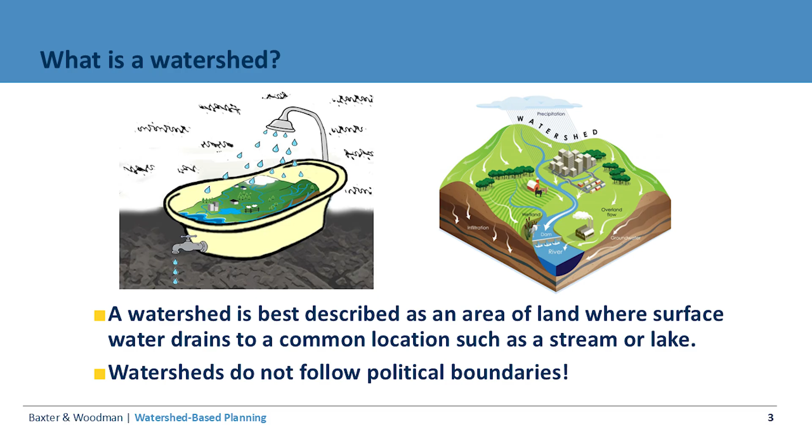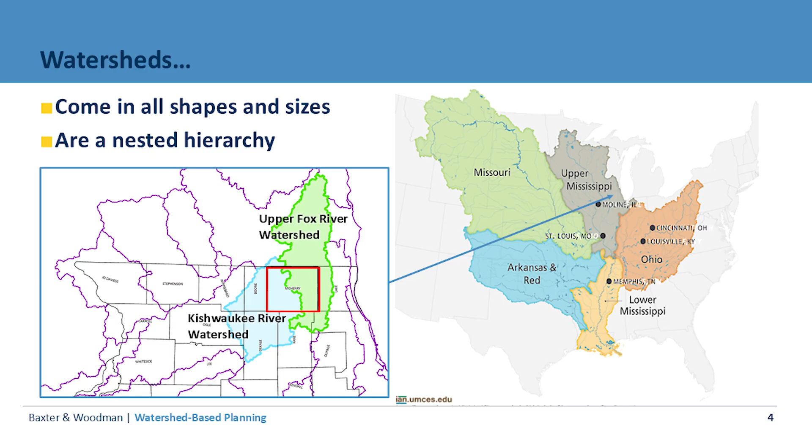So watersheds come in all shapes and sizes, and they are basically a nested hierarchy. If you remember from grade school, almost all of the water in Illinois drains to the Mississippi. That's obviously the largest size watershed that we might have. But there are many smaller watersheds nested within that. And if you look at McHenry County, which is highlighted in red there, you can see that the county is basically split between two larger watersheds, names that you might be familiar with. On the western side of the county is the Kishwaukee River, and on the eastern portion is the Fox River, the upper Fox River Basin.

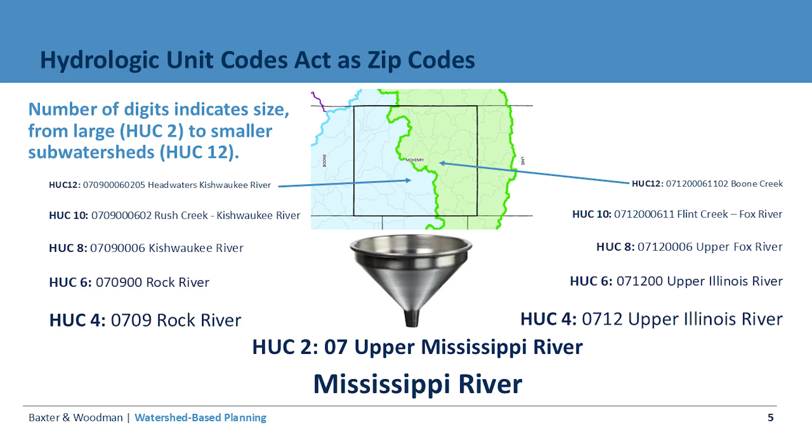So years ago, the U.S. Geological Survey developed a way of basically assigning zip codes, if you will, or addresses to watersheds, and they called them hydrologic unit codes. Essentially, the numbers indicate the size of the watershed. So starting with the largest watersheds, a HUC 2, that would be something along the lines of the Mississippi. And every time you add 2 digits, you're getting a more granular, smaller nested watershed within the larger one. And the watershed-based planning, which I'm going to be talking about today, mostly happens at the HUC 12 level.

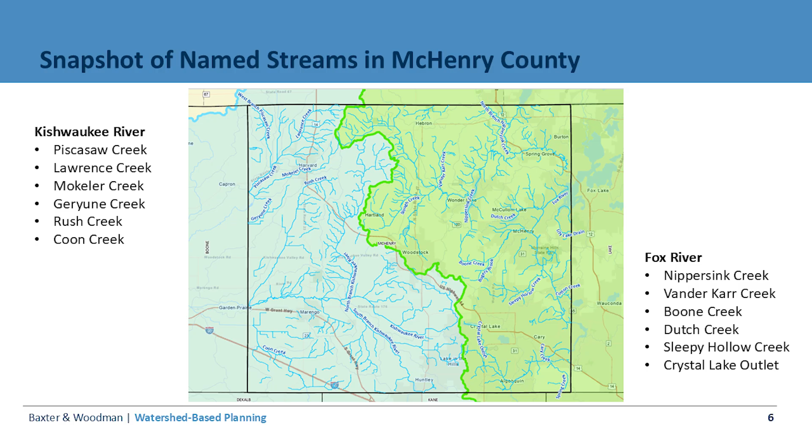And you've seen some of the booths of some of those watershed groups out front.

So what is watershed planning? It's a voluntary, community-supported process that assesses the health of watersheds and develops strategies to improve them. And it's an opportunity to bring the community together to share in the work and cost of restoring our watersheds. It took all of us to get to the state we're in today, and it's going to take all of us working together to repair our watersheds.

Most of my work focuses specifically on watershed-based plans. That is a very particular name. They might also be referred to as 9-element plans or 319 plans. It is a type of planning process that was created by the US EPA. They focus on ways of improving water quality and protecting watersheds and encouraging the development of assessment reports, management plans, and then implementation of those plans.

And the planning process leads to the identification of restoration projects and policy changes. It is a voluntary program, meaning that it's not regulated. EPA and others provide funding to incentivize people to do the work. So that's really important. Having a watershed-based plan opens the door to funding opportunities to get that work done.

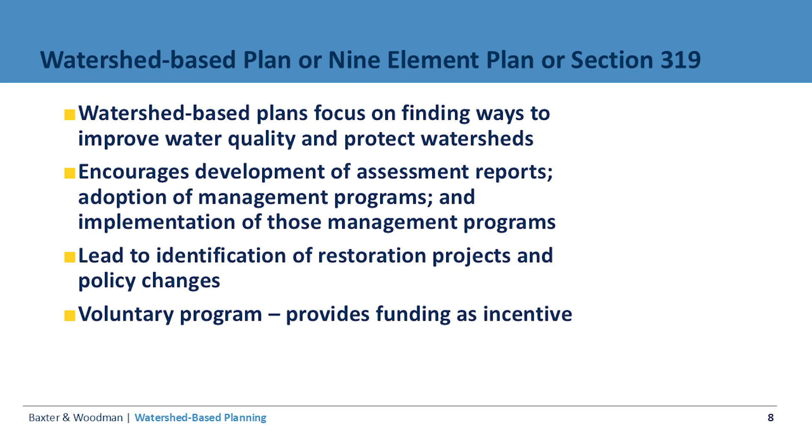So why do you want a watershed plan? Well, to determine the health of your watershed, quantify the restoration needed to improve water quality, identify those actionable projects on the ground that can restore water quality, and build that support for implementing the plan during the planning process, and then to prioritize those projects for funding. So we have a list of which ones are most important and the ones we want to start with.

So who typically leads the watershed planning process? It's typically led by a single municipal leader or a watershed champion. And we have some watershed champions here in the room today. Regardless of who completes the plan, it benefits all of the residents and municipalities within that community. And typically during the planning process, the cost of the plan itself is shared out amongst the municipalities within that watershed. And the planning process can pay for itself.

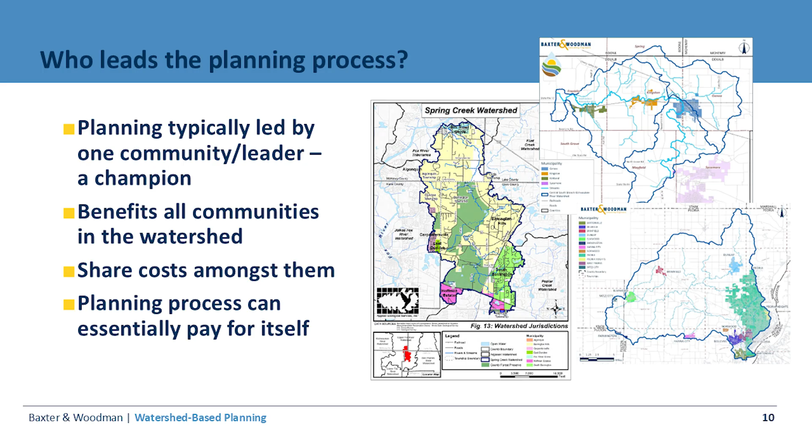Again, there are programs out there that will get you funding to implement the projects, and if you were to get funding for even one stream restoration project, you're probably going to get back twice as much as what you would have put in to the planning process itself.

So the steps of the watershed planning process start with building those partnerships with the community. First and foremost, we're going to assess and characterize the watershed, what's going on, the existing conditions. We're going to develop goals and identify actionable solutions to repair water quality and design an implementation program to get the work done over time. And then also in the plan, there's basically a way to measure plan progress over time and monitor, making sure that what we're doing is remedying the issues. The watershed planning process might last 1.5 years or 2 years, and over that time period, usually we're meeting every other month. So again, building those partnerships.

So taking a step back, I've been talking a lot about repairing water quality. So let's talk a little bit about what affects our water quality. Water pollution, surface water pollution comes sort of in two main sources. The first is permitted sources, or point sources, which include things like wastewater treatment plants, industrial polluters, and construction sites. All of these are permitted sources.

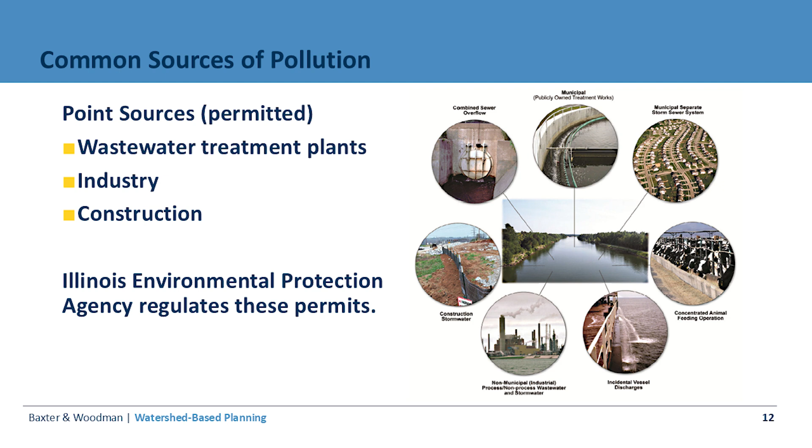So that means Illinois Environmental Protection Agency has permits with these entities, and they agree on what those entities are allowed to discharge. A watershed-based plan focuses on everything else, which is basically considered non-point source pollution. So overland flow, any pollution that might come from urban sources off of streets and parking lots, or agricultural areas, or stream bank erosion. So again, that's the focus of a watershed-based plan.

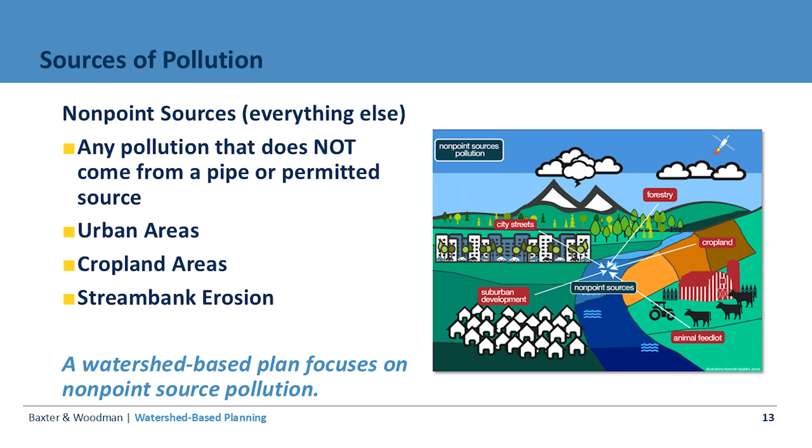There are basically 3 main pollutants that we focus on in these plans, and those are nutrients, which are nitrogen and phosphorus, and sediment. Nutrients are obviously necessary for plant growth. We need that in order to grow our crops so we can eat.

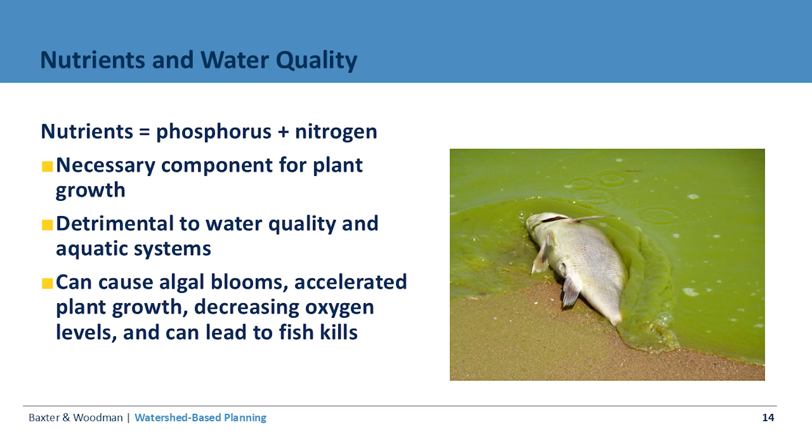But some of those same nutrients are very detrimental to water systems, aquatic systems. Aquatic plants cannot take up nutrients at the same pace as plants on land. And it can cause algal blooms and accelerated plant growth and lead to fish kills. Sources of nutrients include stream bank erosion, agricultural runoff, lawn fertilizers, failing septic systems, and some of those permitted sources that we mentioned earlier.

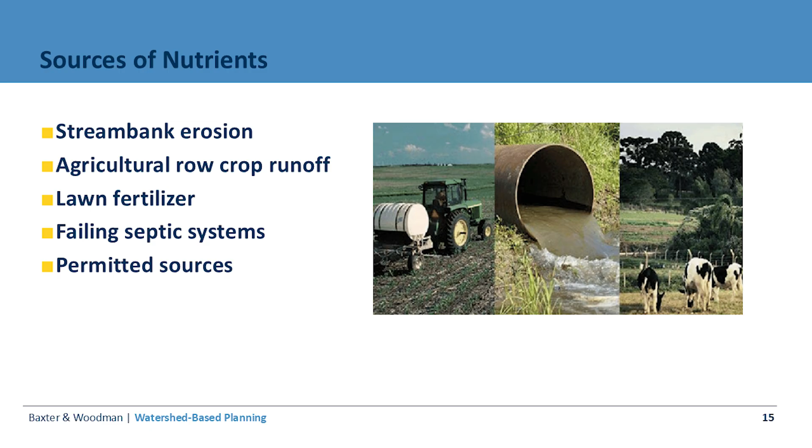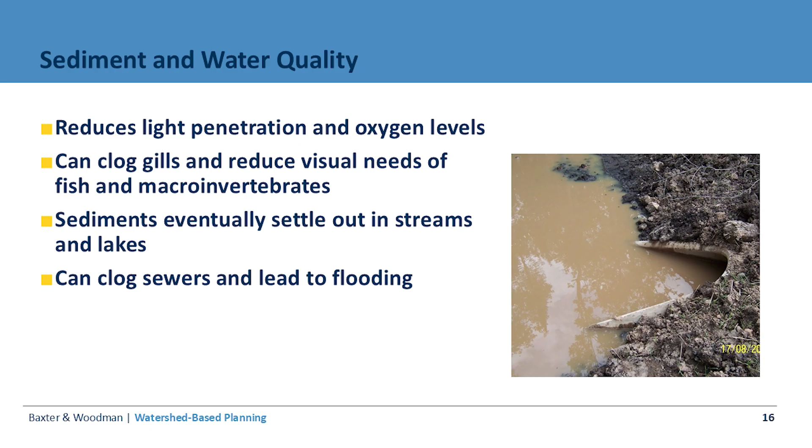Sediment reduces light penetration and oxygen levels, and it can clog fish gills and make it harder for fish to see and be able to hunt and feed. And it can also settle out in streams and lakes, causing the need for dredging, et cetera. And it can also lead to flooding if it's clogging some of our sewers.

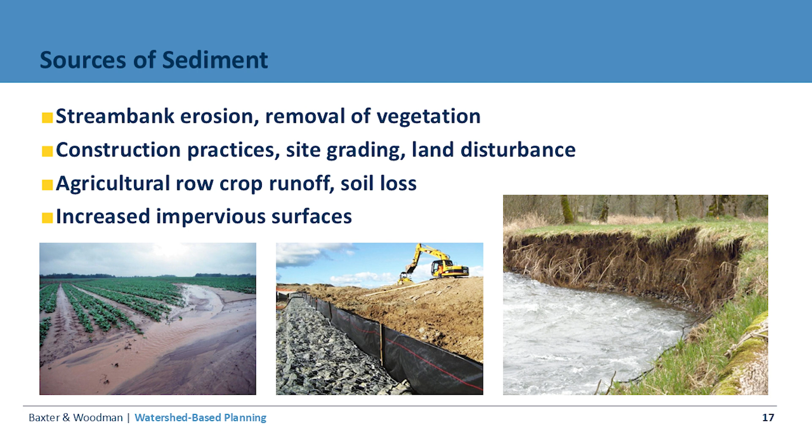Sources of sediment include stream bank erosion and bare banks, construction practices, site grading and land disturbance, agricultural row crop runoff and soil loss, and increased impervious surfaces. So all of things that we all deal with in both urban and rural areas.

So a watershed plan is going to include an action plan, which essentially serves as a roadmap to how we can restore water quality. That action plan is typically divided into 2 components. The first half is a programmatic section, which includes policy recommendations and watershed-wide recommendations, things we could do anywhere, like this is a type of practice we might want to install. And then the other half of the action plan is the site-specific measures. Those include the on-the-ground projects that we would have found early on in the planning process, and include things like stream bank restoration projects, et cetera.

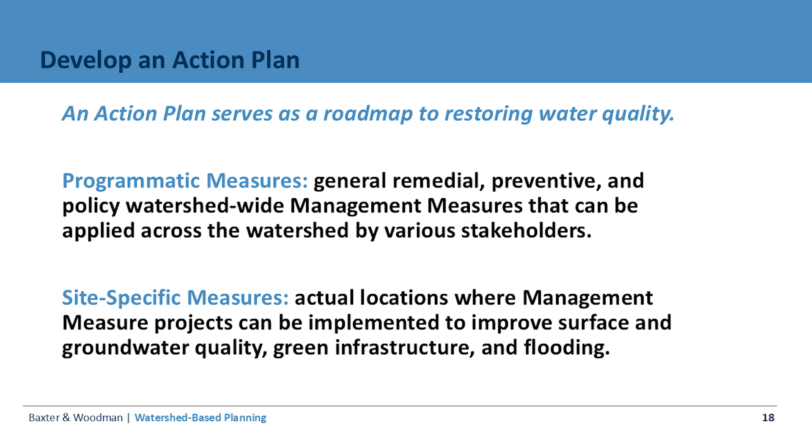In any one watershed plan, there are usually many policy recommendations, and McHenry County is already doing a lot of these, but typically, first and foremost, we want to have the communities adopt the plan so they can implement it. We would encourage ordinance reviews and updates, green infrastructure network protection, sensible salting programs. I know McHenry County has a pretty amazing sensible salting program already. Conservation design and low-impact development guidance, green stormwater management, septic system maintenance, native landscaping, and pavement alternatives.

And then the site-specific measures, and these vary from watershed to watershed, but most commonly they're going to include stream bank and riparian area restorations, first and foremost, wetland restorations, detention basin retrofits, agricultural practices, and then other urban BMPs such as rain gardens, permeable pavers, and bioswales. And I know Brad and Michelle will be talking about some of these various measures in their presentations. And all of these are meant to address water quality, but almost all of them also include flooding benefits. So they're definitely going to provide multiple benefits for the community.

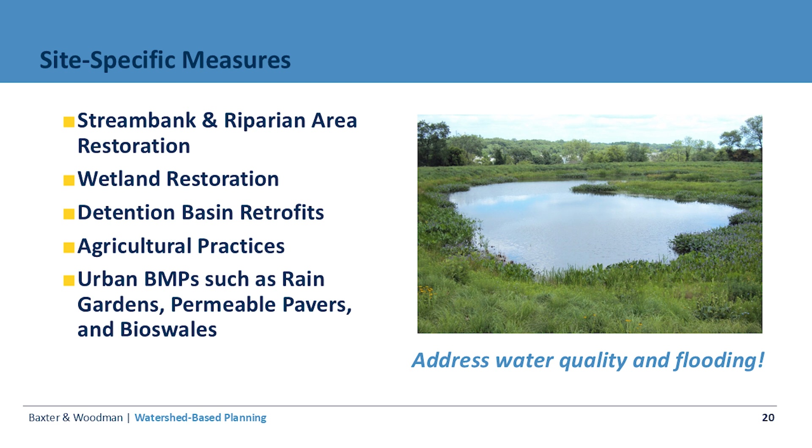We include a site-specific action plan table in all of our plans. Probably boring for the average person, but it's basically a big long list of maybe upwards of 200 projects where we have done the homework ahead of time so that the community is ready to go out for funding for these. It's going to include information on where the site is located and what those existing conditions are, what our recommendations are to restore that site, an expected load reduction for removing some of those pollutants, a priority, and then some guidelines on who is responsible for implementing those projects. But the point is, it's ready to go out for grant funding.

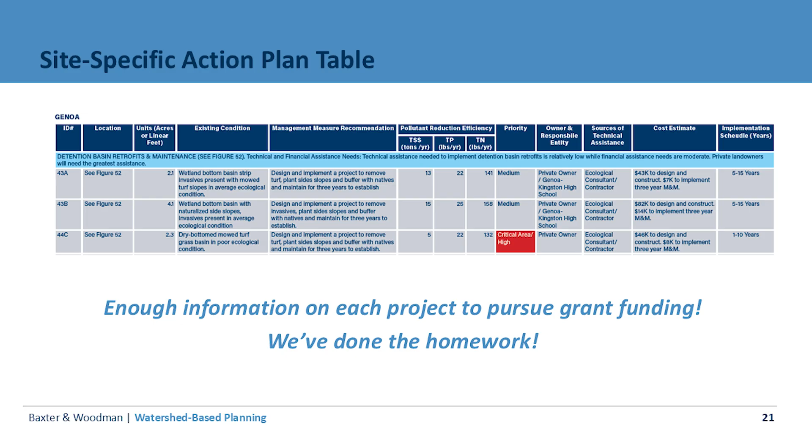And then there's a whole section of the plan dedicated to how we're going to implement them. It includes a schedule for all of those projects, as well as an identification of roles and responsibilities for who is going to be doing the implementation. An information and education program: how are we going to get the word out about the plan so that we know what recommendations are included?

It's going to include a water quality monitoring component. How are we going to measure water quality to know that over time we are making improvements? And if we're not making improvements, we want to know that so that we can adjust and adapt our plan accordingly. And then it's also going to include potential funding sources. So

I've mentioned up at the top that a watershed-based plan opens the door for funding through the 319 program, but it also opens the door to other federal and state programs. And they cover a whole range of topics, including water quality, restoration, agriculture, flooding, and stormwater management, wildlife habitat, and recreation and trails grants. And there's also limited funding available to do the planning work itself through a couple different programs through IEPA.

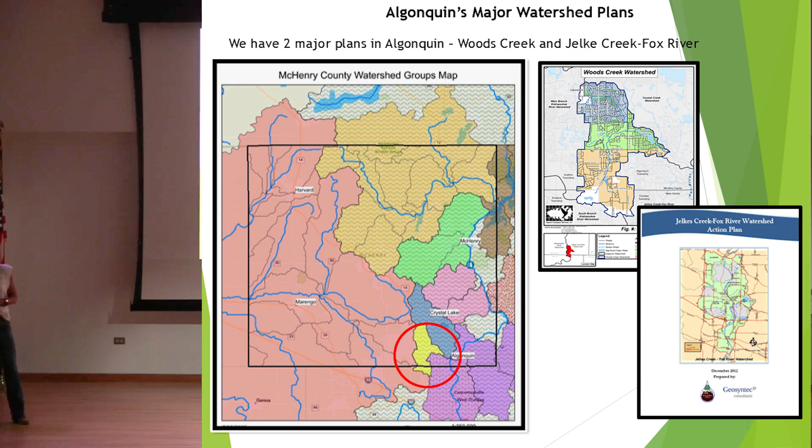In the village of Algonquin, we are in two major watersheds, the Woods Creek watershed and the Jelke Creek-Fox River watershed. You can see where we are right here. I'm going to talk about what we've done specifically in the village of Algonquin in these watersheds to implement the things in our watershed plans.

First question is, why do you want to implement your watershed plan? The plan has a lot of goals in it, and you're trying to achieve benefits for your community and you're trying to mitigate problems that you have in your community. We also have all regulations now. We have our MS4 permits, our county stormwater ordinances, other things that require actionable items that are coming up.

Some of the goals that we're trying to achieve: stormwater runoff storage. So we want to reestablish or increase volume in detention basins. Stormwater infiltration and water quality. We want to do some flood mitigation. All of our communities are probably experiencing that a lot now. So we want to reestablish the floodplain connections that we have.

We are, as Cecily talked about, trying to stop and lessen erosion and sediment control. And then a tertiary benefit of all this is wildlife habitat, biodiversity, and beautification. Just some examples of all of these goals that we've done in Algonquin.

This is where we were recreating runoff storage. So this area back here was a detention basin. It's all grown in with invasive species. Here's the detention basin. We did a restoration and we reestablished the detention.

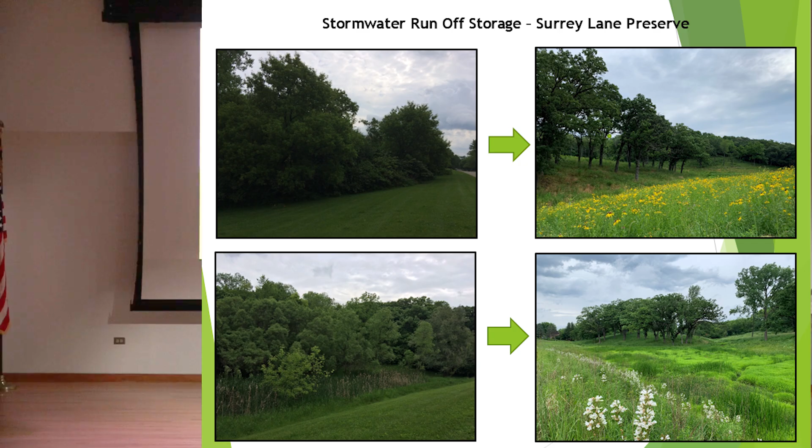We dredged this out. Every time it would rain, it would overflow this basin and run down the street and flood out 2 or 3 garages. So we don't have that problem anymore. And lo and behold, when we did the restoration, there was a beautiful oak woodland behind this detention basin.

This was a project we did. We've done many of these for water quality. So we have the typical turf grass detention basins that were built back in the 70s, 80s, 90s. And I think all of them in Algonquin now we have retrofitted to naturalization. So you can see the benefits we get with that, with water infiltrating and filtering through this. It cleans it before it sends it downstream.

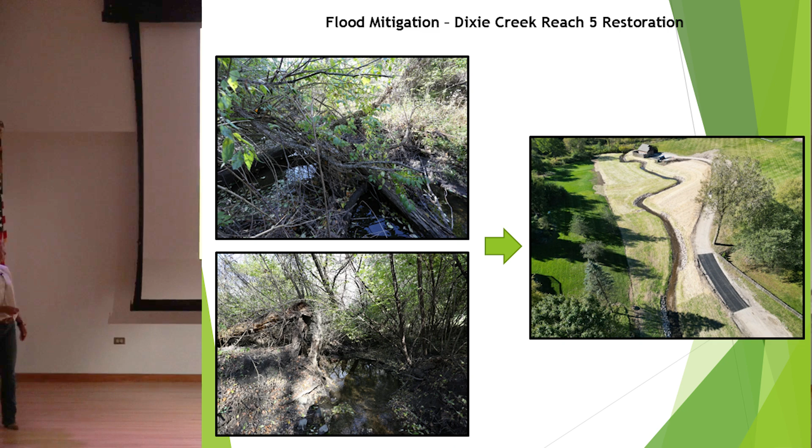Flood mitigation. This is a creek restoration project that we did. We had some flooding that would always occur here where there's a culvert, there's a house over here. We would flood out the house with this creek because this is what it used to look like. The water couldn't flow, the banks were eroded, and the debris would get jammed up and it would flood out all over this area.

Erosion and sediment control. Like I said, we've done many projects for this, creek projects, some before and after. And just so you know, on all these pictures, I am standing relatively in the same place on the before and after photos. So you really get a perspective of what it looks like when it's done. So here we're restoring the stream, reestablishing the floodplain, and why that's important is I want to show you this little video.

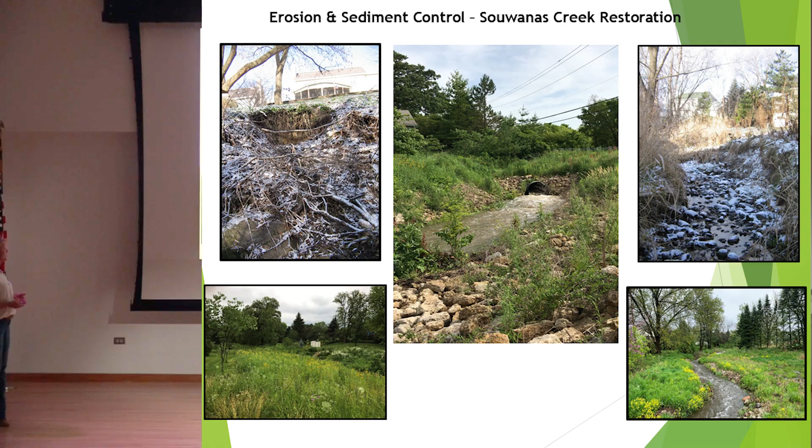This is after a 4-inch rainfall, so you can see the creek is staying in its channel. We have cross vanes, we have stone toe protection. All of this helps with that erosion control and sending the water correctly downstream. So that's how your creek restoration should look and how it should work after you have a significant rain event.

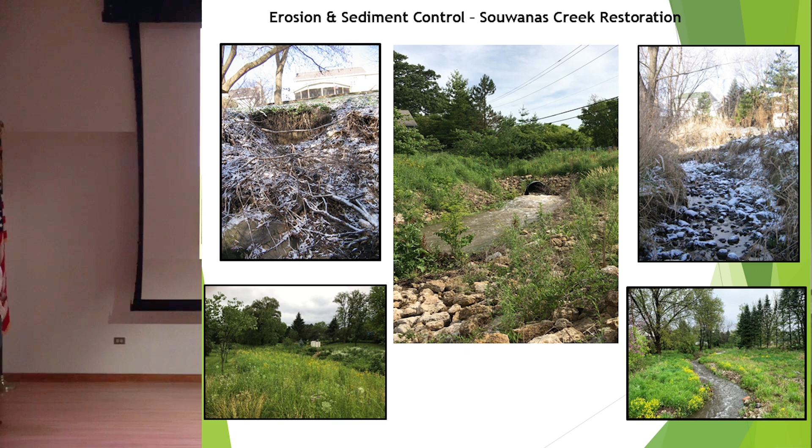So the next thing is to figure out where we want to implement our projects. Cecily talked about this a lot. In your watershed plan, you will have a list of action items. This will list all the things that you can do in the watershed, who owns them, if they're critical areas so that you can prioritize them, and a cost estimate and a timing for the projects.

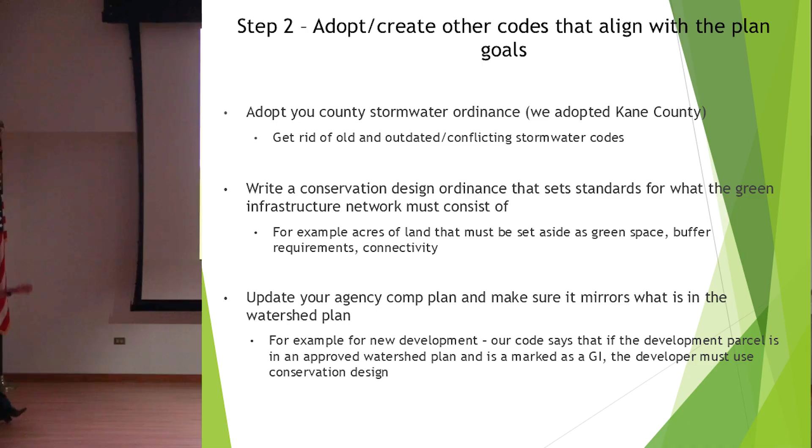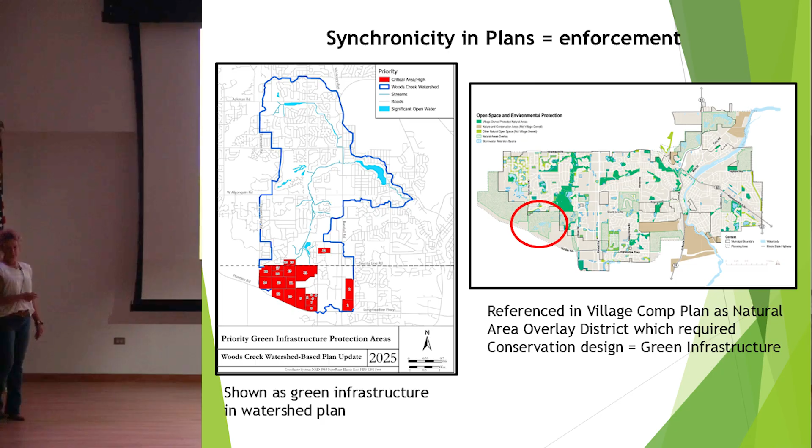Here is our watershed plan, and it shows our priority of green infrastructure areas. Then the village's comp plan has this directly shown in here with the coding that it's a natural area overlay district. Anybody who comes into the village looking at your comp plan, looking to build or do anything, knows right off the bat that this is your game plan and you've got it set and you've got it prioritized in your agency.

You can use the stormwater ordinance. The county stormwater ordinances often have measures in them for collecting fees and getting funding for doing projects. The Kane County stormwater ordinance allows individual municipalities or agencies to collect the fees ourselves. So that ordinance has a wetland mitigation fee for isolated wetlands or anything that's not under the jurisdiction of the Corps. We can charge a fee in lieu of wetland, which we charge $100,000 per acre.

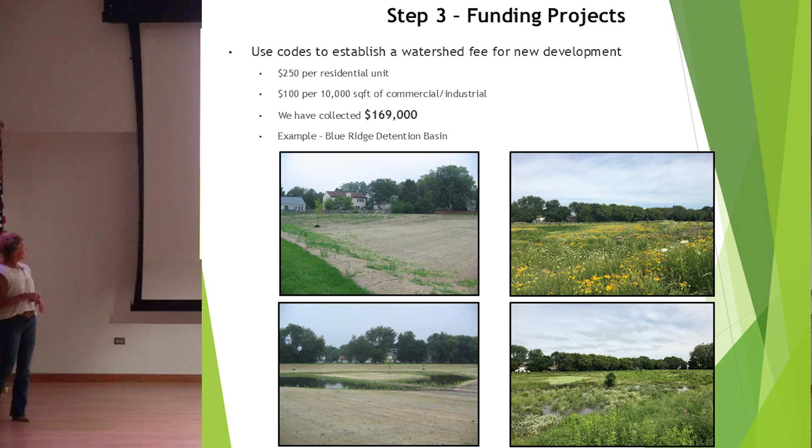There was a detention basin behind all of this that was just full of phragmite and cattail and honeysuckle, buckthorn. We cleaned it all out. We reestablished the detention basin volume, and we made a nice little, we call this the Gaslight Park Bird and Butterfly Sanctuary.

Another way, Cecily talked about this a little bit, is to get grants. There's a lot of things out there, EPA, private grants, ComEd, clean energy. Soil and water conservation districts often have funding for your projects. DCEO, we've gotten funding from them. And you can see the amounts that we've collected over the years through our grant funding.

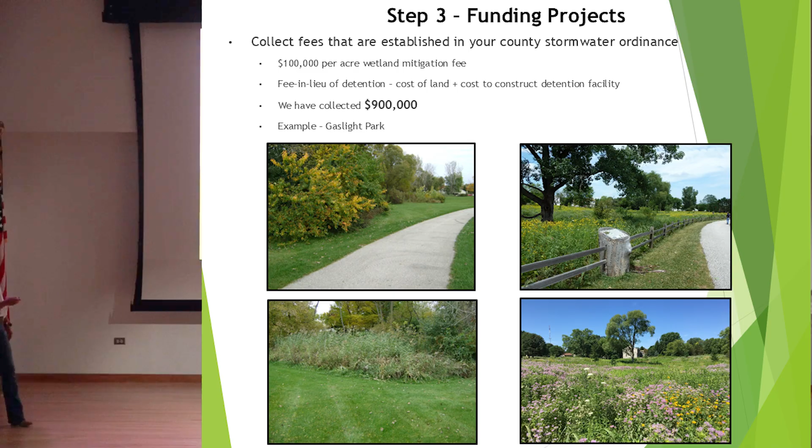I just highlighted here an EPA 319 grant, which was our Rat Creek Reach 5 stabilization. So we did a stream bank project, pulled back the banks, cleaned it up, reconnected the floodplain, and made an upland prairie area. And there's an oak woodland up in here too that we restored.

Another great way to get your projects is have new development coming in. If you have that opportunity in your community or agency, have them build and put the green infrastructure into your community. Since development started back up about 5 or 6 years ago, we've had all these different subdivisions and areas come in where we have required that they create and give us green infrastructure. Between all of these, they've installed about 87 acres of this that they've dedicated to the village. The value of that 87 acres is about $4.3 million.

I'm highlighting here just how we use those codes and plans to make that happen. The watershed plan has this area as in our green infrastructure network. It was a golf course. A developer came in, wanted to make it a subdivision. We used the conservation design ordinance, all of that, to make this beautiful meandering wetland detention natural area.

About a third of the subdivision is green infrastructure that was dedicated to the village. We're going into like our 4th year of establishing that, and it's just absolutely gorgeous, beautiful. That project alone was worth about a $1.6 million value.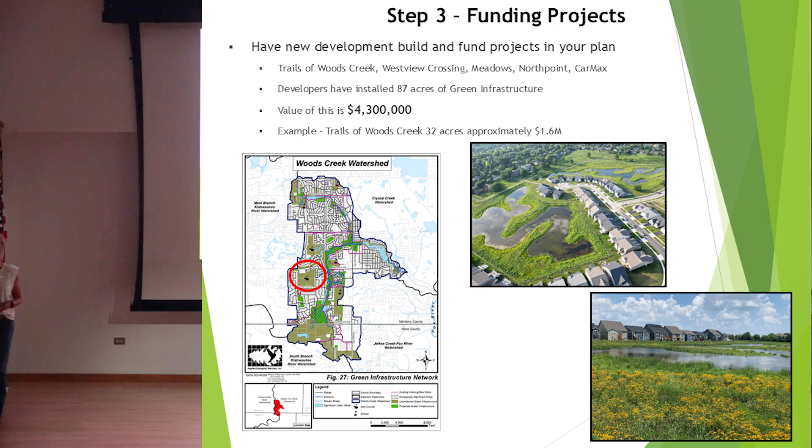Finally, you also can create some other local funding sources. Our board has been so supportive of our green infrastructure program, what we're doing, the environmental aspects of bringing in new development, what that means for the village, for groundwater, for clean water. So we have a telecommunications tax, which we have put towards doing projects, doing maintenance of projects. We also collect the local sales tax, and they support us in putting those dollars towards doing restoration projects.

Another option for getting projects done is to build them into other construction projects. So I'm Public Works and I'm the cheerleader, so I have an advantage to adding these into a lot of the things that we're doing in the village. An example is we got federal funding for a road project, and we were widening the road, so we had to put in extra detention, and we made the detention basins naturalized. So federal funding helped for paying for that green infrastructure. Presidential Park, we just got an OSLAD grant, and we put in naturalized detentions in Presidential Park. So the OSLAD funding helped pay for that.

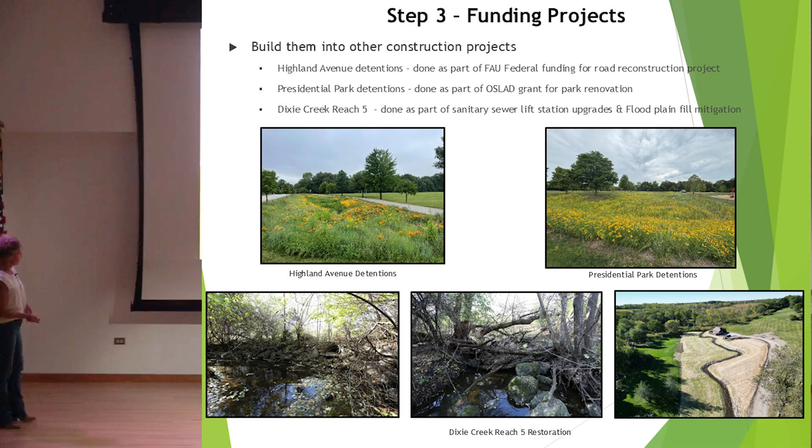Some other ideas that you can utilize, we do not do these in the village of Algonquin. We have all those other measures that we implement, but you can certainly establish special service areas and collect fees to fund some of your projects. You can establish a stormwater utility fee in whatever way that looks like for impervious area in your community, and you can work with a lot of nonprofit organizations out there. Sometimes they will help you install the projects. If you have projects installed, they will sometimes help you with the long-term maintenance of this. Brad's going to talk a lot about the importance of what that is.

So basically, to sum it up, we have funded about $14 million worth of projects in the village of Algonquin through all of our different funding sources. None of that was property tax money, none of it. It was all the mechanisms that I have spoken to you about. I leave you with, it's possible. You can do it, you can make this happen. One of my favorite things is teamwork makes the dream work. And with that, Brad is going to talk to you a little bit about long-term maintenance of these and a little bit of, once we've got the funding, how they are constructed and get built.

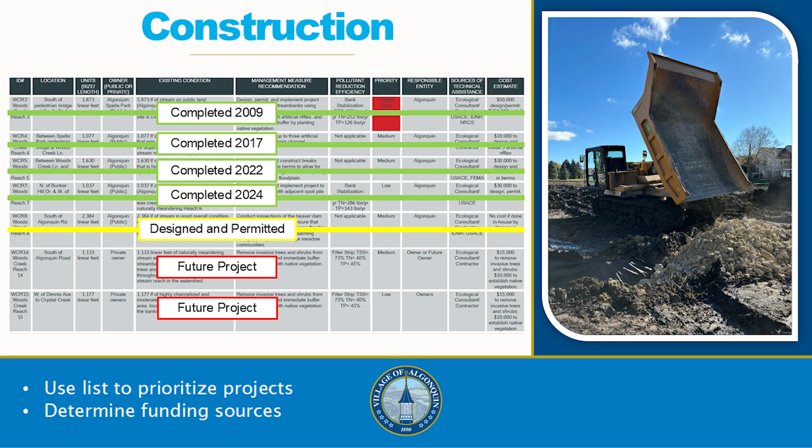We have currently applied for an EPA 319 grant, so everybody keep your fingers crossed that we get that so we can construct this project next year. And then we have 2 other reaches that are future projects that are on our list to complete as we move through. So, like I said, these are very important action plans that are something that you can move through with that homework being done, and you can just go through the list and the prioritization is done for you.

Ecological restoration, I've heard that a few times tonight. What does that mean? It's really important to have a clear view of what ecological restoration means to you and your organization before you undertake one of these projects. Typically, it means restoring using native vegetation. There's a lot of gray area in there, native to what time frame, what ecosystem, what book, what research, but that's the base level of it. We're typically looking to restore these areas to pre-European settlement conditions. So before Europeans came over, put a plow to everything, put agricultural drain tile in, drained all the wetlands.

There are a lot of design, permitting, maintenance considerations when working on an ecological restoration project. For example, a place like NLI or Citizens for Conservation, they're more focused on those very high C-value, very high quality restorations. They want to get as close to a remnant ecosystem as possible. In the village of Algonquin, we don't have any remnant systems left. We're working with very degraded areas, and our goal is not to get back to a remnant, high-quality prairie, but we want to get 70% of the way there.

We want to have the bang for your buck plants that are giving those ecosystem services that are maintainable and also able to be constructed at a reasonable cost, because we don't have a huge volunteer base. We don't have local seed sources to make wonderfully diverse mixes. So we're more of that bang for your buck, what's going to get us 70% of that way to that remnant ecosystem.

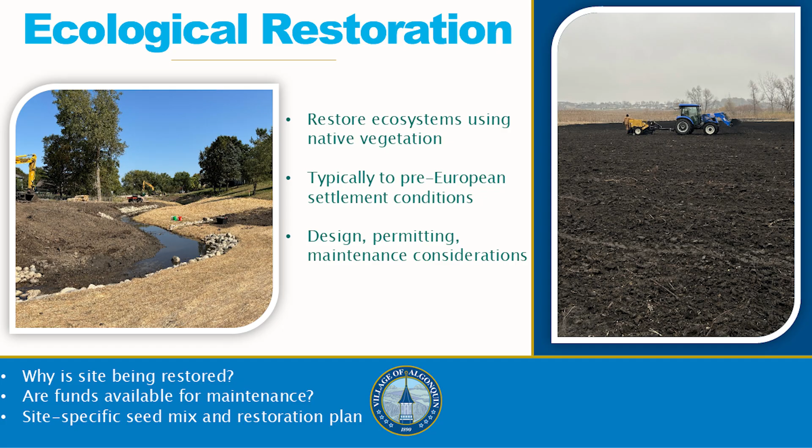A couple of design considerations. Aha, got a laser, I love lasers. This is another shot of Woods Creek, Trails of Woods Creek restoration that Michelle was talking about.

When you're looking at designing these naturalized detention basins, it's really important that you're involved from the concept phase, working with the engineers or the developer when these are built. They're built a little bit differently than your normal turf grass basins. Really important to have this area here from normal water level down to about 6 to 12 inches below normal water level. It's a shelf for emergent plants that like to be submerged most of the time in that shallow area. Those plants will grow up and they will do a lot of things for this basin.

They will stabilize the soil. They will act as a filter. They will help keep the nutrient levels down in the water. And then a lot of times, if you choose the right plants, something like pickerel weed, it ends up being really pretty, has a really beautiful flower to it. So those are a lot different, where a lot of the detention basins, it's a 3-to-1 slope to the normal water line, and then it dives off and you don't have that nice emergent plant zone shelf.

Above normal water line, it's important to use the hydrographs or the bounce, so when it rains, when the water comes up and drops back down, you gotta look at those hydrographs and be able to plan out your seed mix, keeping those in mind, because each of these basins acts a little bit differently, and you have to site the plants in the correct zone, because in that area where it bounces, you have to have plants that can be out of water some of the time, can be inundated with water for a day, 2 days, even up to a week. So it's really important to have that kind of wet prairie zone in that bounce as that pond fills and drains over time. And then above that, you can have your more mesic, your drier species above that high water level on the pond.

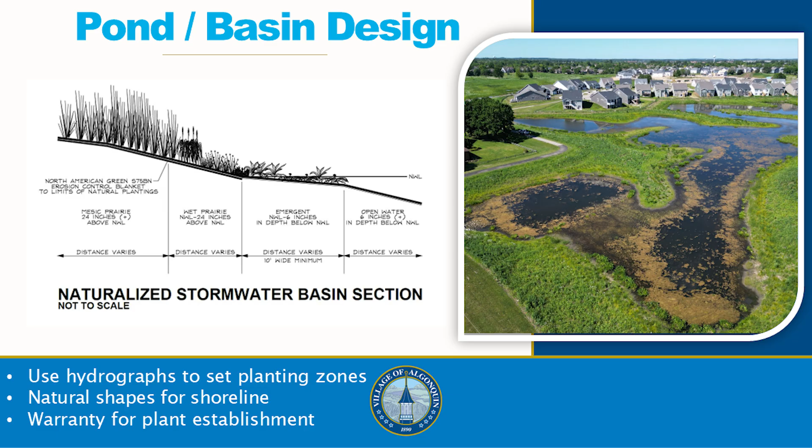As Scott had mentioned earlier, all of our drinking water comes from groundwater in McHenry County. So having that recharge and that slowing down of the water to keep it going into those shallow aquifers is key to sustainability for our drinking water. And nowhere is that more important than here in McHenry County. So having those established floodplain benches to allow that recharge is very, very important.

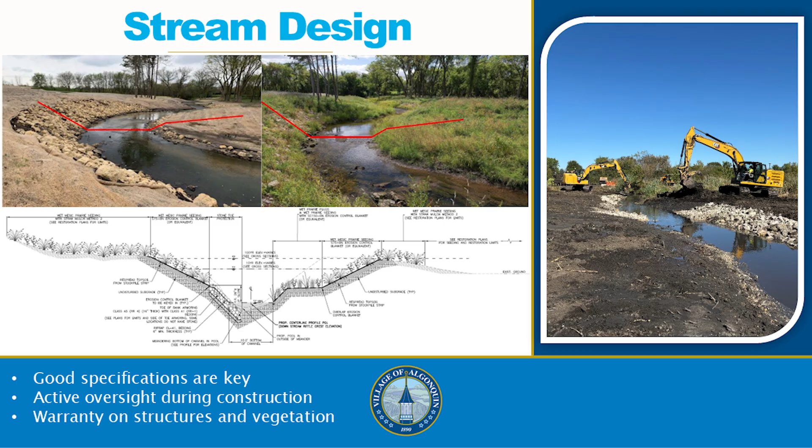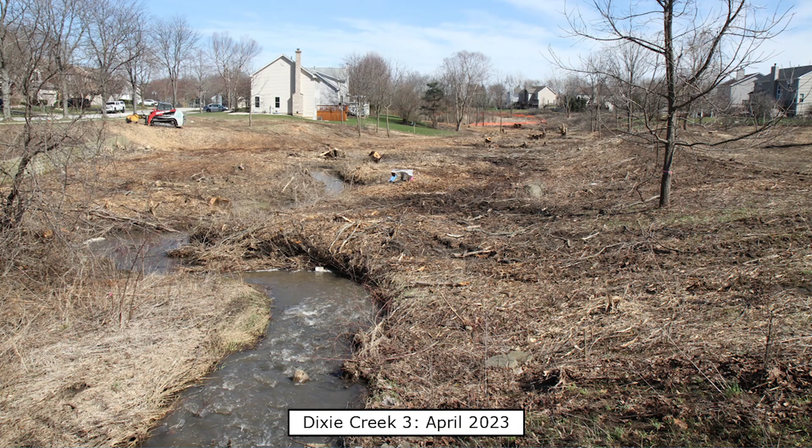This is what I like to call the bomb just went off phase. So this is where I get probably the most questions and the most complaints, because we come in, and this is where you see all the trash. You see like little kids' toys. We've found tents, we found cars, we found buckets, you name it. It's in there, and you find it all when the trees come down. But here you can really see the condition of the stream. It's severely eroded on the banks. There's really no connection to that floodplain bench.

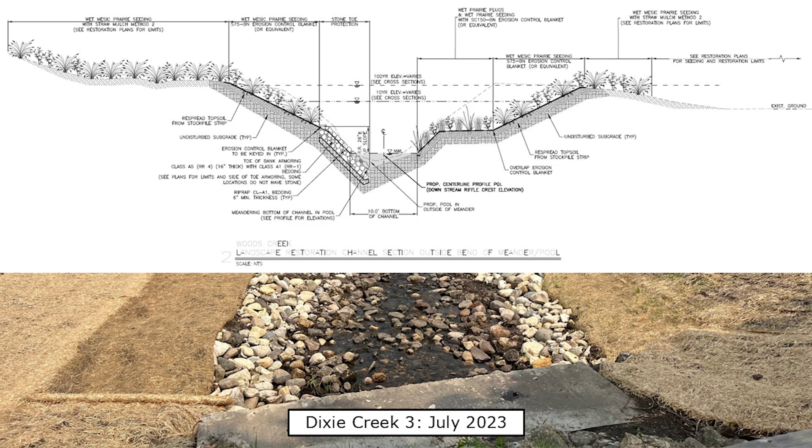Once again, I want to point out the importance of this spot here, the floodplain bench. We've got armoring here on the outside bend of some of these to prevent erosion from cutting into the bank. And then on this side, in this cross section, you can see the floodplain bench that's set right at that bank full elevation. So when you get that 2 to 6 month rainfall, the water will spread out and slow down.

A lot of people will walk by this and think it's always looked like that, nobody's been in there. Little do they know all of the design, all the maintenance, and all the work that went into these, but that's kind of the intention, is that 95% of the people are gonna walk by and be like, oh, look at this. It's a beautiful stream with a beautiful prairie.

Some of the lessons that we've learned implementing these projects over the years, one of them is the importance of construction oversight. So you have these plans that are drawn up, and then you hand it off to a contractor. You need somebody on site who knows how to read and interpret those plans, who's on the team of the owner to be able to advocate for the proper construction. They're checking things, they're double checking things, they're triple checking things.

One of the issues we had in one of our projects is that bankfull elevation was set too high. So the banks were up higher than they should be. And we had installed these massive rocks. Each of these rocks is hundreds and hundreds of pounds in these cross vane structures. And what happened with that bankfull elevation being set at the wrong height? When we had a rain event, the water would rush down and created a big pool, a scour pool.

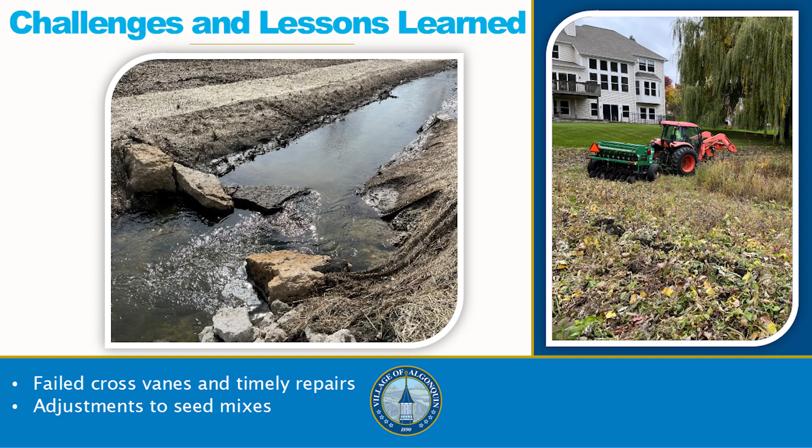There are some other species that kind of fall into that bully of the prairie. Big bluestem, Indian grass, New England aster. There's a few of those that we've learned they just don't really work well on these small sites in the more suburban environments.

Another lesson learned is a restoration project we did in 2013. This was tied with an IDOT bypass project, if you know the Route 31 bypass that goes around to the west of downtown Algonquin. We relocated a section of the Crystal Creek outlet during that project, and we found out during some regular monitoring that the stream bank was eroding. This is right after construction. This blue line was where it had eroded to. So within 10 years, we had lost about 10 feet of the bank that had eroded.

Found that after a burn. I like to walk the sites because you can see everything really well, and I was like, uh-oh, Houston, we got a problem. Got to take care of this. So put together a plan to get it permitted, took it to our board to get approved. Like Michelle said, we have tons of support from our board, and we got this fixed.

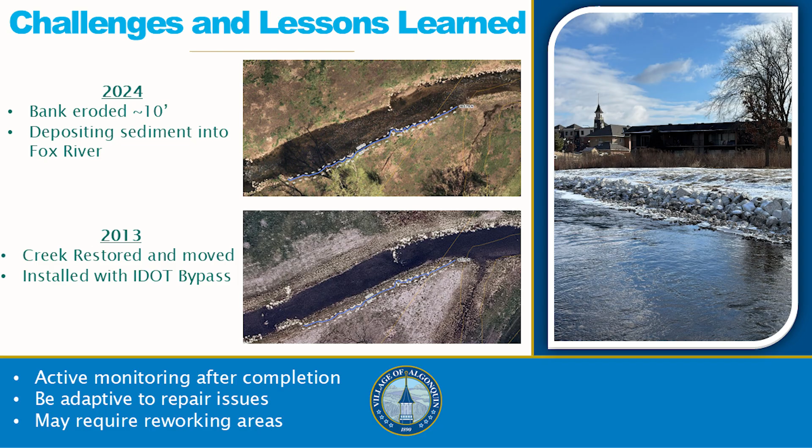So this is what the site looked like before, and this is after the emergency repair was done, where we went in, pulled back those banks, actually built it back up a little bit, put in some stone toe protection, and got that stabilized. So the big takeaway there is just because the project is done, it doesn't mean that you're not going to have to go back in and do touch-ups. This was a big touch-up. We try to catch them before they get that big. But nonetheless, once the project is done, it doesn't mean you just walk away and you go, okay, it's a restoration, we're done, see ya.

Now what I really like to talk about, maintenance. In some ways, this is the difficult part of the project. Establishment maintenance, the first 3 to 5 years are really key to the establishment of these sites. That's when the site's been disturbed, you get all these opportunistic, early successional species that come in, your ragweeds, clovers, and they go, ooh, we got all this new habitat, let's grow up. So all of a sudden, you've got all these weeds, and people come by and say, looks like that project is just full of weeds. I'm like, yep, it is. First year, it's like 70% weeds. That's why we go in and mow it.

That establishment maintenance is more hands-on, it's more intensive. It's something that takes a lot more effort. So it's important to have that adaptive management to be able to call your crew and say, hey, we need you out here. We've got some sweet clover that's blooming. Ragweed's going crazy. It typically has higher cost than your long-term maintenance, so it's really important. We build that into a lot of our projects to have that first 3 years of establishment maintenance in place when we sign the contract.

Maintenance is going to be different than your normal traditional landscaping maintenance. There's specialized equipment, specialized knowledge, specialized things that you don't want to mess up, i.e. prescribed burning. So it's very important to have a trained crew or an educated and trained contractor conduct this work. You can't just hire a normal landscaper that does your traditional landscapes and expect them to do a good job. Good example here is this is Crystal Creek down in Towne Park. This is all reed canary grass that was sprayed. The crew just spot sprays. They know how to identify the species we want to target. They'll go in and spray just the species we want to hit.

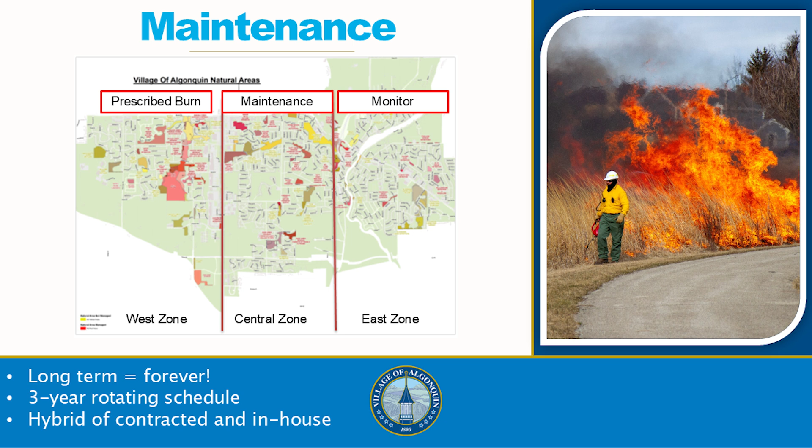Some of the benefits, we've already talked about a lot of these. There's a lot of those ancillary benefits with these restorations: habitat restoration, more biodiversity, a lot more pollinators, a lot more flora and fauna come back to those areas. You got the deep root systems that help rebuild soil health and recharge our shallow water aquifers.

Cost benefits: in the village of Algonquin, we see a cost benefit on the long-term maintenance of the naturalized areas as opposed to the traditional landscaping. Here are some current numbers. In 2025, we have 161 turf sites in the village of Algonquin, totaling 220 acres. We spend $460,000 a year in the maintenance of those sites. We have 56 sites totaling 445 acres, so almost double the acreage of restored natural areas, and we spend about $150,000 a year for those established naturalized sites. So over time, that benefit will pay off. In the village, when we have a property, we're not going to get rid of that property. We're in it for the long haul. We're in it for the long term. So these savings will add up over time.

Some of the successes, real quick, because I'm running out of time. I've got a problem with really taking a long time and talking through these things.

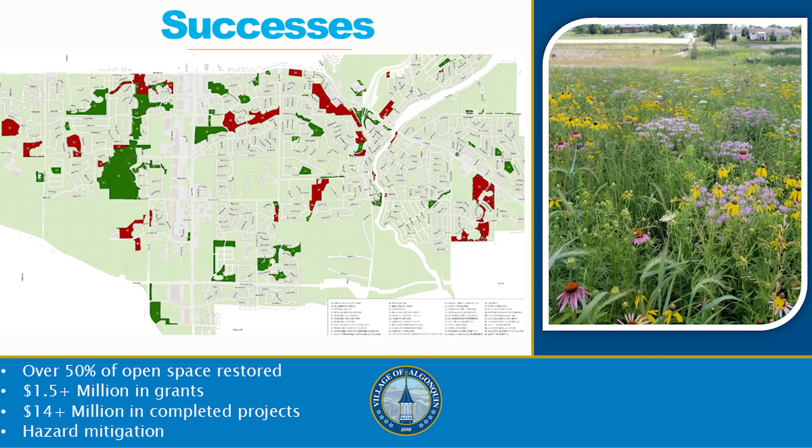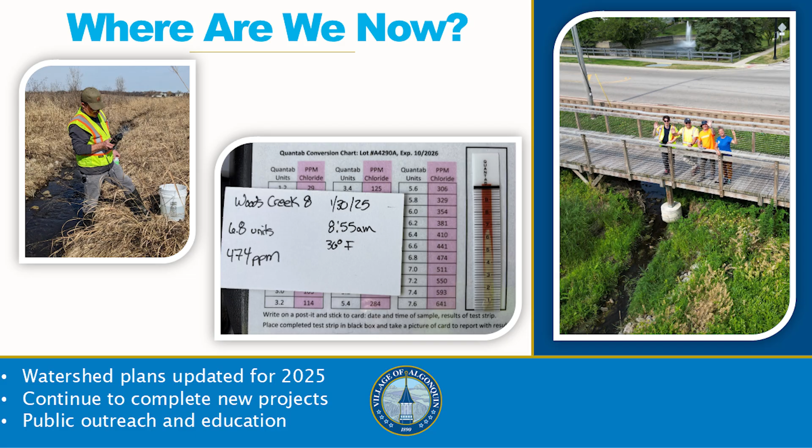We are now working on, we've updated our plans, our watershed plans. We're continuing to update, go after new grants, construct new projects. And then we're also working on public outreach and education, trying to engage more with the community, engage more with volunteers, and get more people involved, because we really want to build a grassroots network that embeds this green infrastructure into the fabric of the community and have it be something that will perpetuate into the future and not be something that kind of fades away or gets forgotten about in the future.

And with that, and like 30 seconds to spare, I will turn it back over to Scott. So our next speaker is not nearly as dynamic as the previous speakers, but I'll try and do my best.

What Brad was talking about, I would think it's really important to understand the benefits of green infrastructure. All the stuff that we're talking about today is wonderful, very thoughtful, but it's also very practical. I think the numbers that Brad showed, just the dramatic cost savings of naturalized areas that are done right and maintained properly are just unbelievable. But there are so many other benefits that go along with that.

We are experiencing more intense storm events now than we have in the past. A 6-inch storm used to be a catastrophic event. Now a 6-inch storm is a storm. And the work that the village of Algonquin has done, when they have a 6-inch storm now, they are not staying up at night sweating bullets. They're having to pay attention to things, but the green infrastructure is helping to manage that stormwater.

And they are able to either postpone or eliminate capital projects, replacement culverts underneath roadways. They don't need to do that because the infrastructure above that roadway is absorbing and infiltrating that water. Everything we're talking about today is extremely practical. And as a county, we want to emulate what the village of Algonquin has done, and we would like to help empower our communities to emulate the successes that the village of Algonquin have done as well.

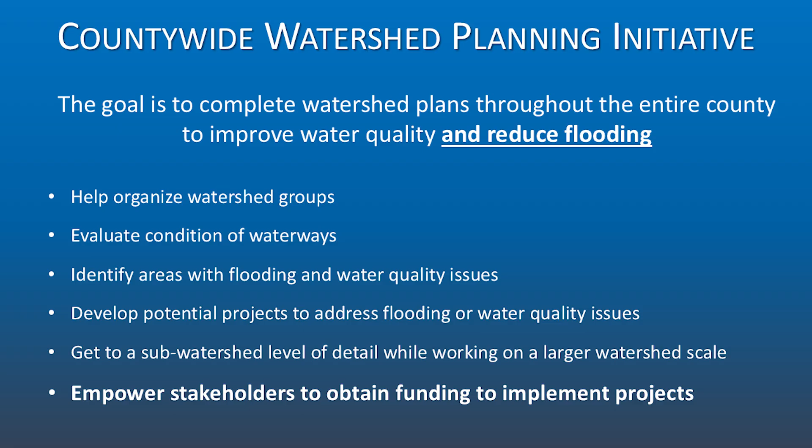As Cecily had talked about, we have 2 main watersheds in the county. So the west half of the county, the water flows to the Kishwaukee River. The east half of the county, the water flows to the Fox River. We basically have a mini continental divide right here in McHenry County. It's roughly Route 14, so it really is pretty interesting.

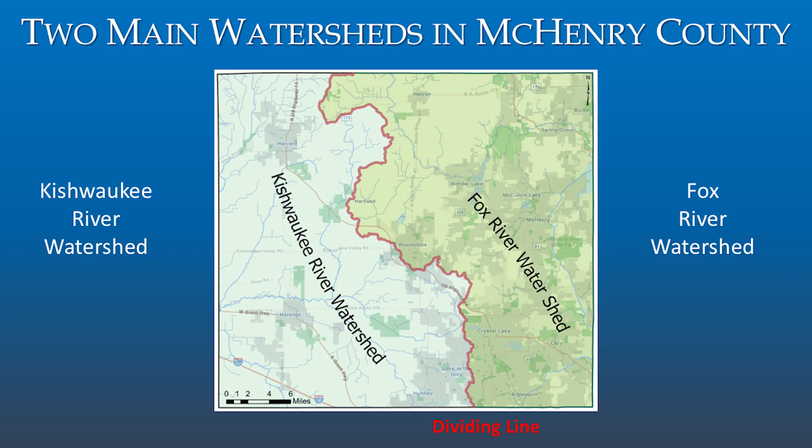But what we're going to do is we want to break the county up into 3 primary watersheds. So the Kishwaukee River would be a complete watershed, but we'd break up the Fox River watershed into 2 primary watersheds. So you'd have the Fox River watershed and the Nippersink Creek watershed. Now the Nippersink Creek watershed is a significant water body, we have a great watershed group that has already done a comprehensive watershed-based plan for the Nippersink Creek. So the groundwork has already been laid.

So this makes a lot of sense. It's intuitive. It also ties into our county's Wetland Restoration Fund. So there's a lot of continuity. We're creating a system that supports itself. Within each of these primary watersheds is a large number of sub-watersheds.

So as Cecily was talking about, all the streams that feed to the Kishwaukee River, all the streams that feed to the Fox River, and all the streams that feed to Nippersink Creek are sub-watersheds that provide a boundary that we can look at, identify problems within those boundaries, and have a manageable sized area to work with.

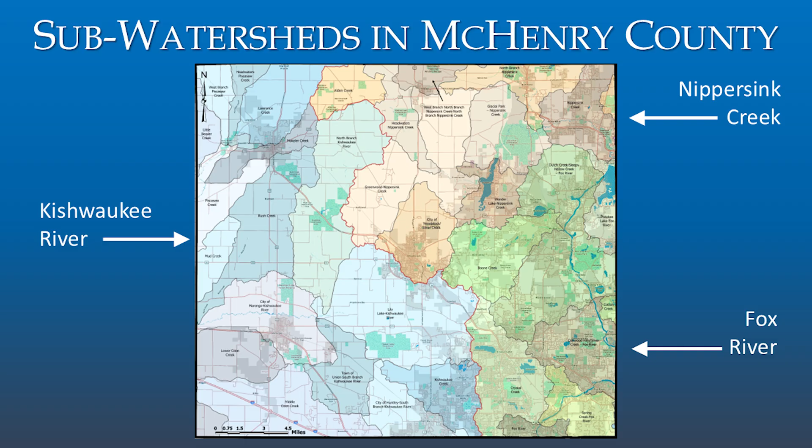So we have already done a lot of watershed plans in the county. That's part of why a lot of us are so proud of our county. We really have an engaged community. And so a lot of watershed plans have been done for the county. Now, not all of these meet the EPA's 9 criteria. So Marengo did a study, but it was more of a demographic and economic study. It's going to provide a lot of great demographic information for us to use, but it's not a watershed-based plan.

In the Kish, we have 2 sub-watershed plans that have been done. But in the Fox River watershed, we have a lot of watershed plans that have been done. But a lot of these are over 10 years old and need to be updated. And then, like I said, the Nippersink Creek has an amazing watershed plan, but that's over 10 years too, so that needs to be updated.

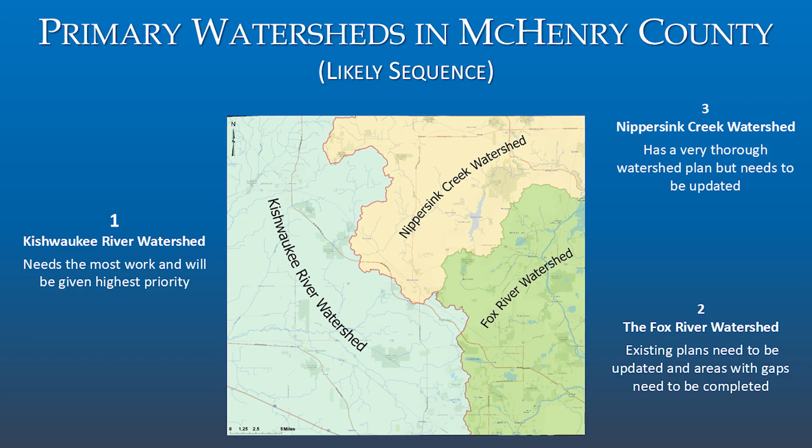The way we would approach this is we would focus on the Kishwaukee River watershed first. It needs the most work. The next primary watershed we would focus on is the Fox River watershed. There are a lot of watershed-based plans already done for that, but they need to be updated. The gaps need to be filled in, and then there needs to be continuity between those plans and the Kishwaukee River watershed plan. And then the third phase would be the Nippersink Creek watershed, which once again has a great watershed plan, but it does need to be updated and have continuity with the other watershed plans.

This is not just talk. We are moving forward with this. We just signed a contract with Cecily Coons from Baxter Woodman. So we are really moving forward with this. The goal is to create a strategic plan that is a solid game plan to complete the broader countywide watershed planning initiative. Cecily will be identifying stream segments and other resources in each of the sub-watersheds that need to be investigated.

And this is critically important because by having all this information identified, we can identify how much it's going to cost to do this area, how much it's going to cost to do this area. So as funding opportunities, different grants come on board, we can hop on those things very quickly and get the funding to accomplish these things. And then identify the task and the sequencing that is needed to be conducted for each of these watershed plans.

In the meantime, we've also created a great resource that we're very proud of. Stoyan Kolev is the division manager for the Water Resources Division, and he worked with our GIS division to create an interactive watershed planning tool. So anybody can go onto here and identify areas that are prone to flooding or water quality issues.

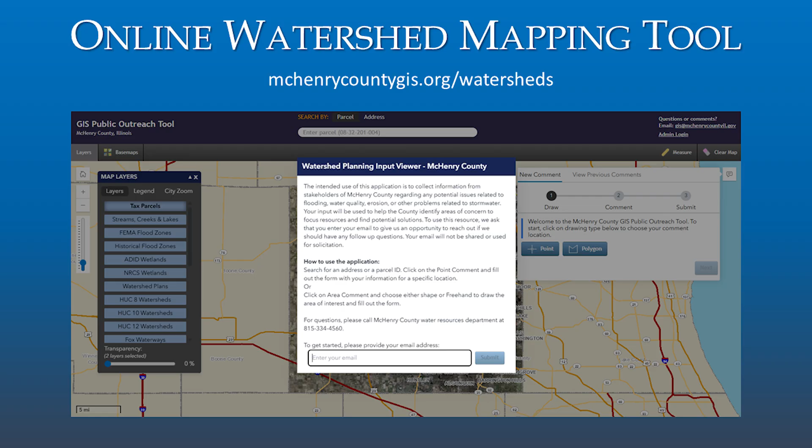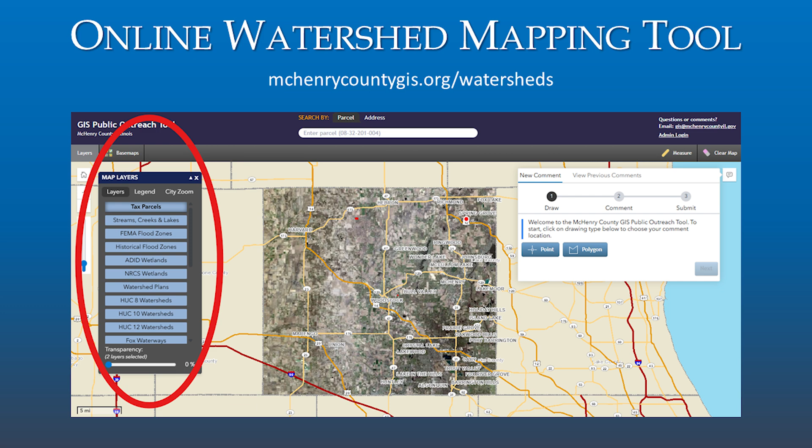So you go on the website, you have different map layers you can turn on, so you can turn on the stream names, the wetland areas, the HUC boundaries, the watershed boundaries, and then you can also look at aerial photos going from 2022 to 1939. So you can look at your areas of interest, look at the land use changes over time. Some years are wet, some years are dry, so you can really get a better understanding of where you're looking.

And so this empowers the community to actually have a voice. You don't have to wait 2 years for a watershed meeting to talk about these things. Anytime you see an issue or have concerns, you can go onto this website and put your information in. This is a tool to empower individuals and communities. And we are really excited about this. We really want to take everything that Algonquin has done and take it to a county level. And the main goal of this is to empower all the stakeholders, the municipalities, the townships, and others that participate.